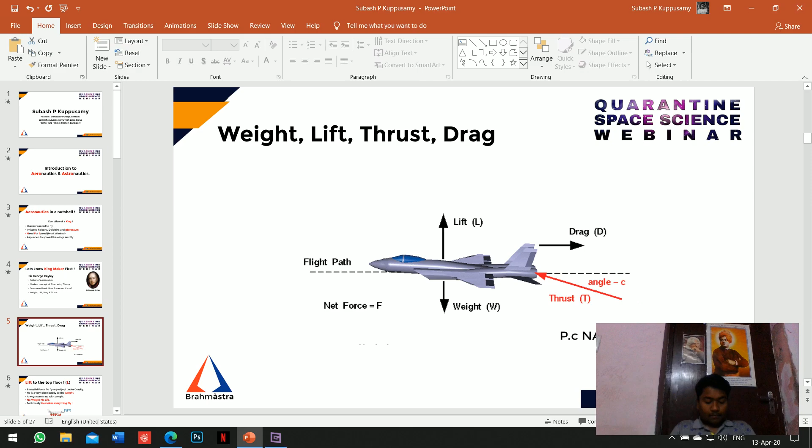He coined the term modern concept of fixed wing theory. He coined mostly the terms weight, lift, drag, and thrust, right? Okay, I'm so sorry.

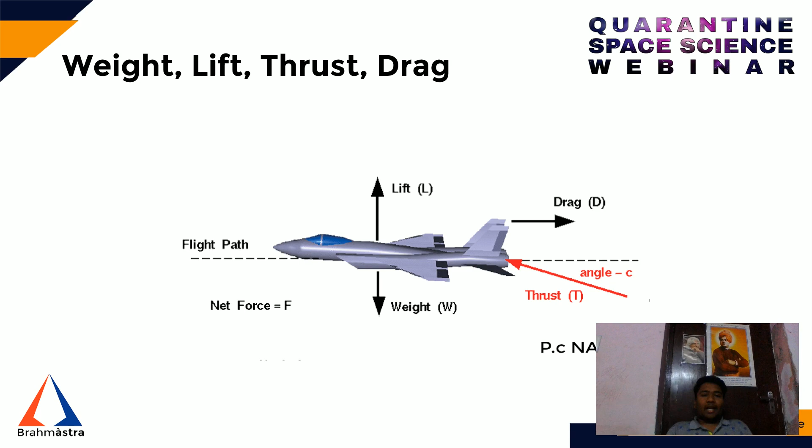Okay, let us see weight, lift, thrust, and drag. People have seen what it is, they will be saying the types of aircraft and everything like that. But the thing is, aeronautics majorly depends upon these four big words: weight, lift, thrust, drag. Without these four words, you cannot even think about aeronautics. Let us see what is lift.

Lift to the top floor - essential force to fly an object under gravity, right? And here is a very close buddy to the weight. Always comes up together. If lift comes up there, there would be weight. If weight comes up there, there would be a lift - no weight, no lift. Of course, if there is no weight, there is no lift. Technically, he makes everything fly. Without the term lift, there is no term called flying.

The next word is drag. Drag him down to the floor. The word drag is to drag the aircraft. He's a bloody bad guy, a very, very bad guy, and he makes your aircraft fall down. If he wants to make your aircraft fall down, okay, he will make your aircraft fall down, right?

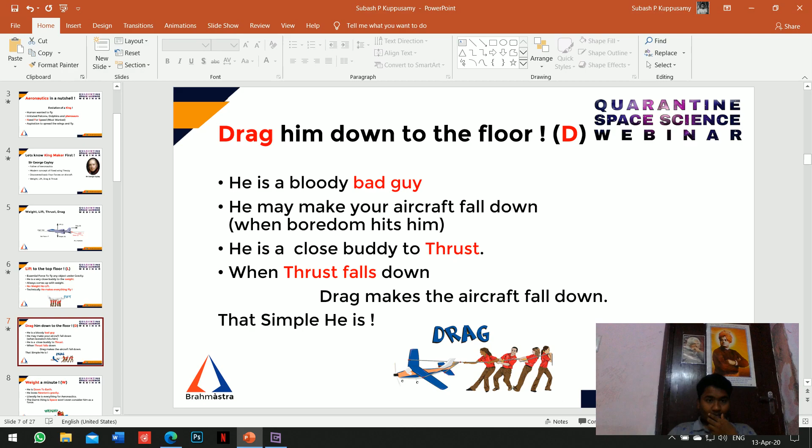Weight. We all know about the weight, and he is very down to earth because whatever you make it in the space, he will go to the earth. That is the term of the earth. And he loves Newton's law of gravity. Newton's law of gravity is whatever you make to be there in the space under atmosphere, it will come to the ground, right? Of course, he loves gravity.

Literally, he is everything for aeronautics. Without weight, you cannot term aeronautics without those four words: lift, weight, thrust, and drag. Literally, he is everything for aeronautics. The contrary thing and the contrast thing about the weight and astronautics is we won't consider the weight in space, because the weight only acts inside the atmosphere. Outside the space, the weight would be calculated as mass.

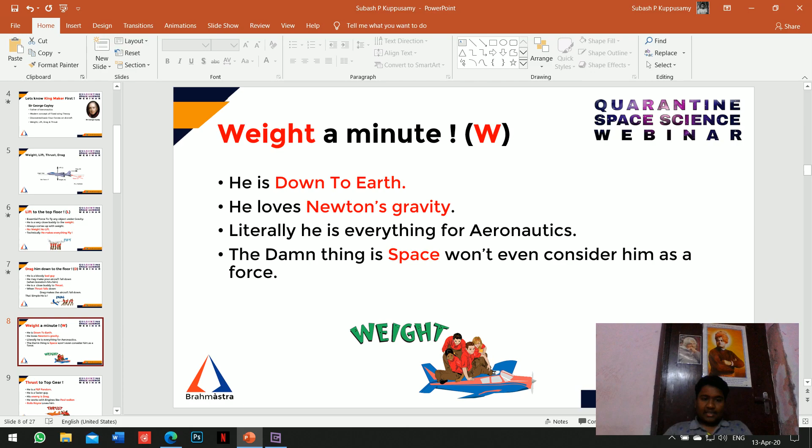The next term is thrust. Thrust is a term used to make the aircraft go in a faster way, you get it? Thrust loves Fast and Furious. He's a flatter guy, faster guy, and his enemy is drag. The drag, as I said, he's a very bad guy, you get it?

Whenever he thinks, he will be making negative vibes to thrust, and he works with the engines, right? The thrust is 100% connected with the engines. The engines make the thrust, and I'll be explaining about the engine soon. The forthcoming slides and engines: if we take the engines, we have known about the Rolls Royce Phantom and cars like those, but most people don't know about that. Rolls Royce is famous for making aircraft engines. They make the world's powerful turbofan engines.

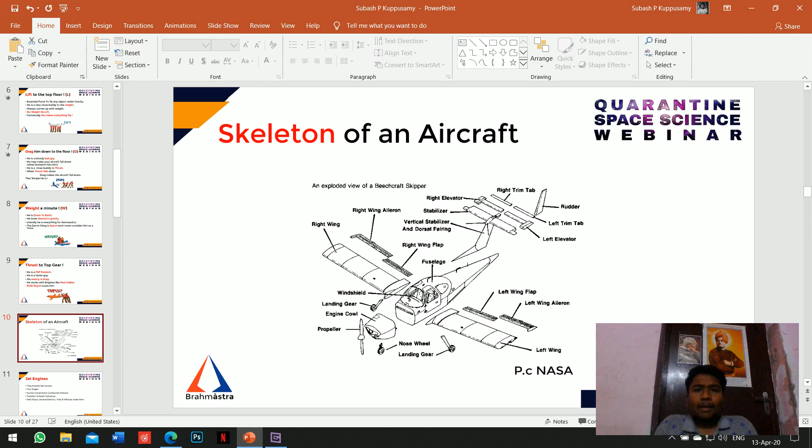Let us go for the propulsion thing. You guys have seen and known about the two-stroke engines, four-stroke engines, and I'm directly jumping to the turbojet engines. Let us see turbojet engines. Turbojet engines are like humans. Like humans, it has four stages.

We inhale, compress with our lungs, we exhale. Before that, we separate the oxygen and the blood, right? Likewise, suction, compression, combustion, and exhaust are the four major steps which take place in a jet engine, same as in the four-stroke engines. The types of turbojet engines are turbojet engine, turboprop engine, turboshaft, and turbofan. And the guys who make these engines are Rolls Royce, General Electric, Pratt and Whitney.

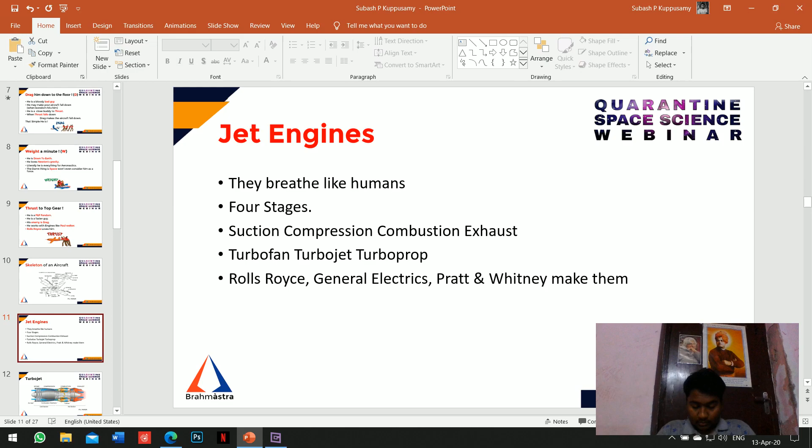Let us see the turbojet engine first.

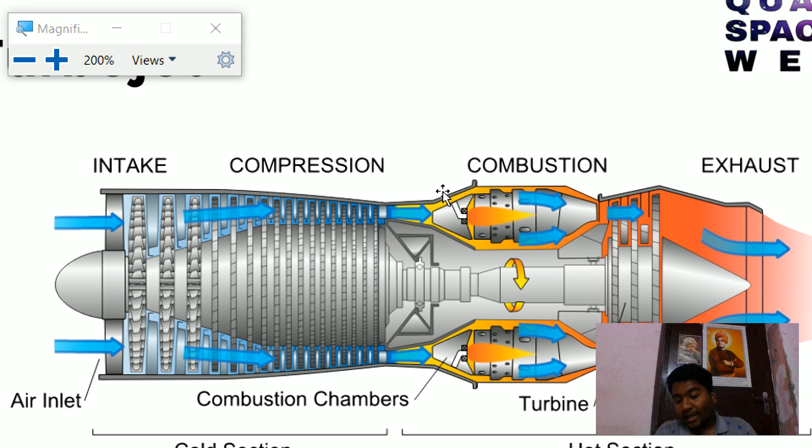The compressed air, fuel and fire mix up there. Exactly here, after this, is the turbine. The work of the turbine is to produce the power.

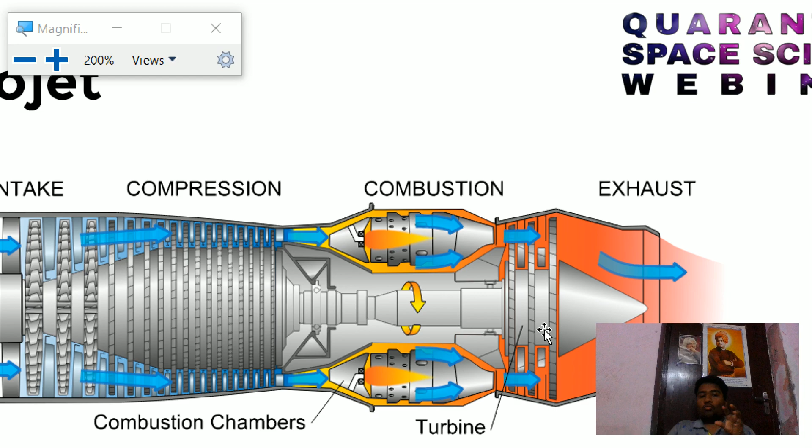For what is that? Let's consider, if we go for the turbofan engine, we dwell on the thrust. If we take the turbo, what is that? Let us see in the next tab. Yeah, it is a turbofan engine, made by Rolls Royce.

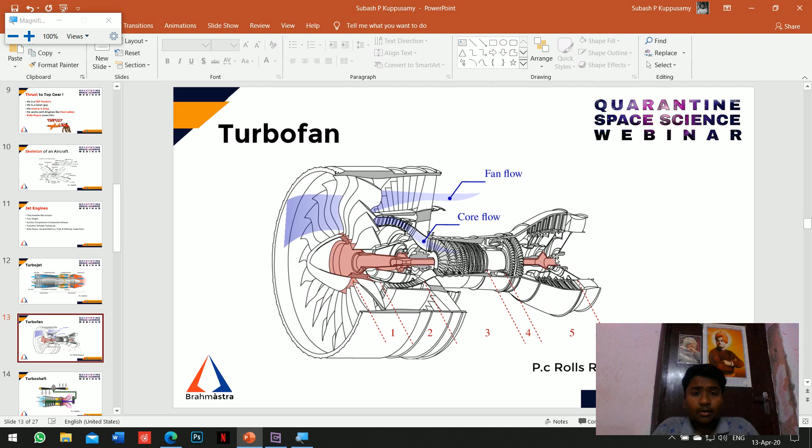This turbofan engine is made by Rolls Royce. I forgot the name of the engine, right? Let us see this. Why it is made here with the bigger fans is...

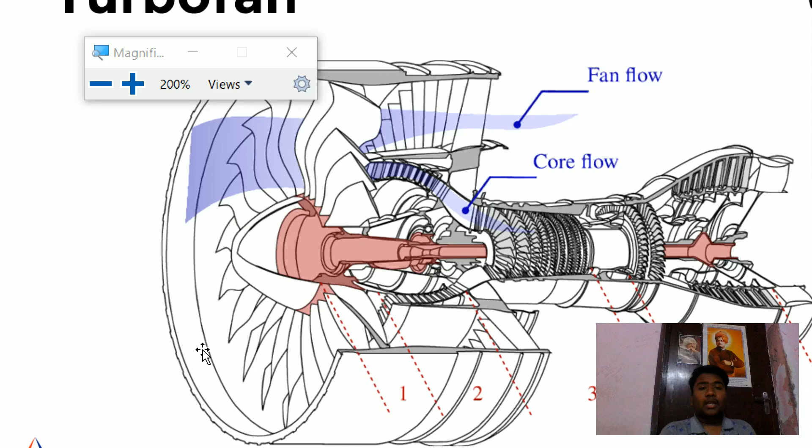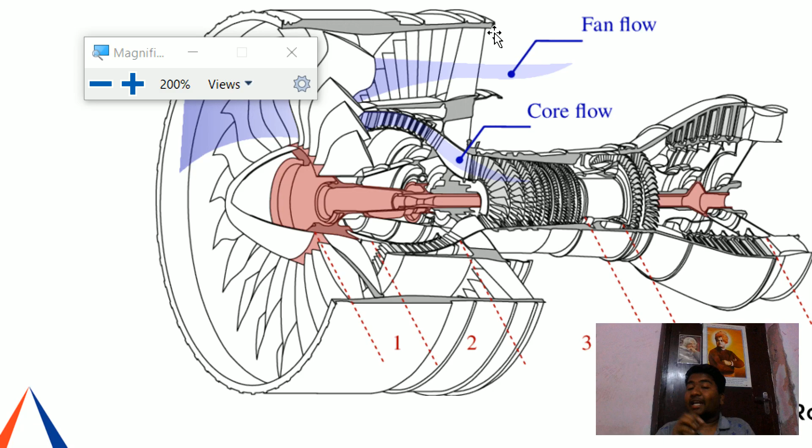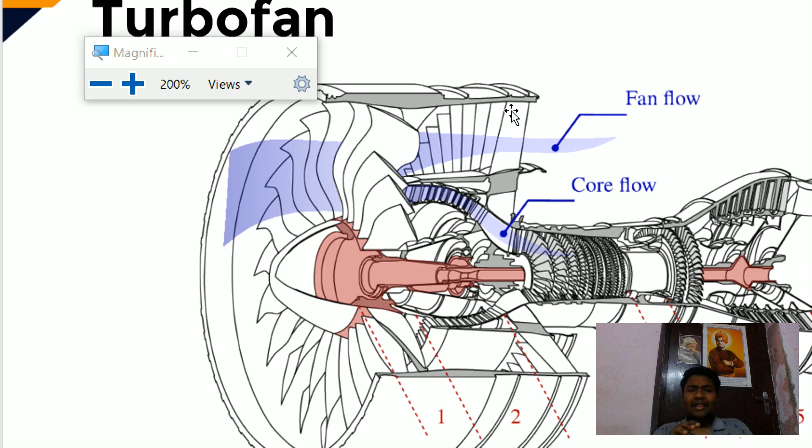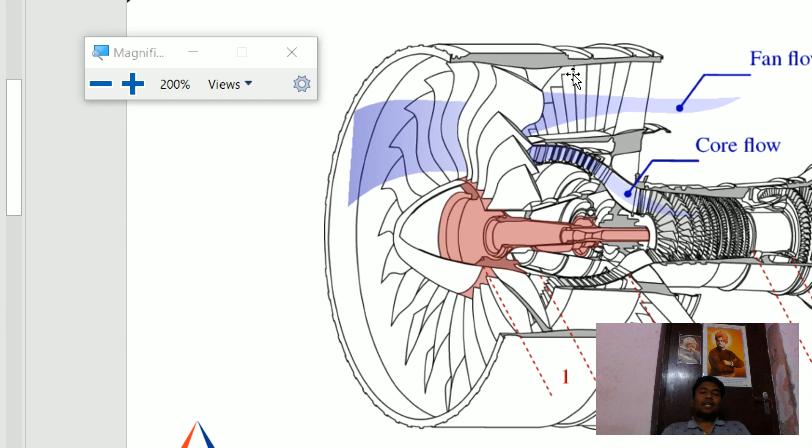Because of that, the engine fails fast. So people came up with the idea of cooling the aircraft engine. What they made is, the front portion of this part, the engine's cowl lip, has been increased in size. I could say 1:3 size. Because of that, cooler air comes in here.

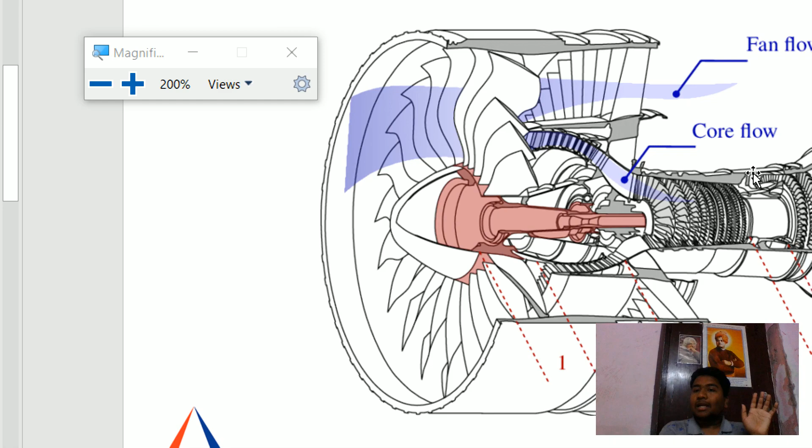Cooler air comes in here and transfers in a double way path. You can see the flow of the air here - the air moves inside the turbine here and the air moves outside the turbine here. The fan flow is given here so it cools the engine. It literally cools the engine.

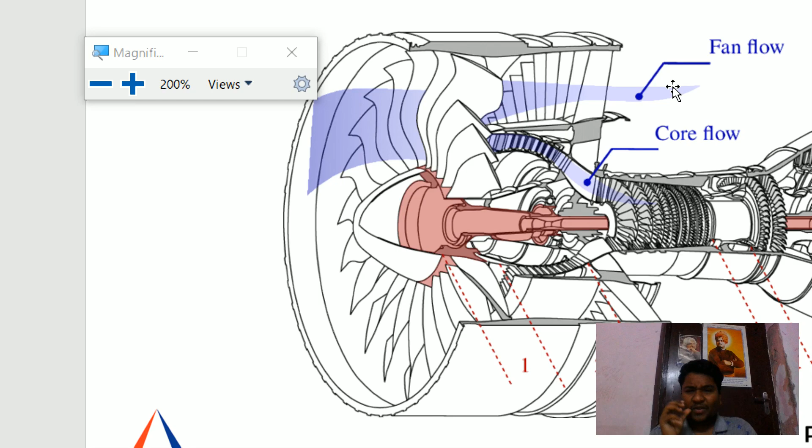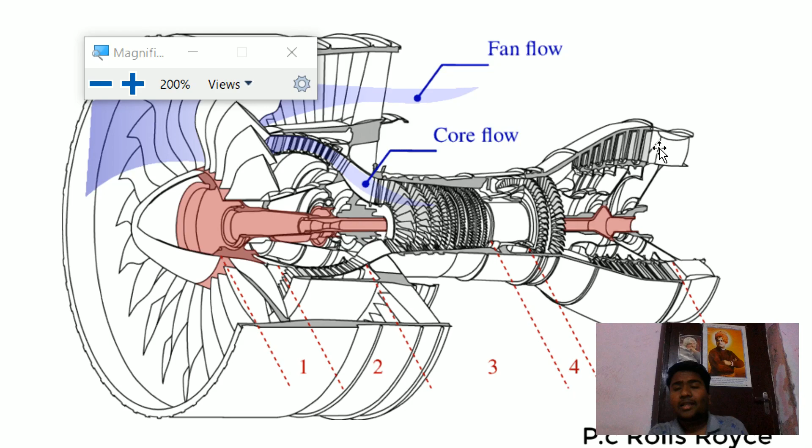There is another trick here. In fighter aircraft, there is a term called afterburner. The afterburner is placed in this position. The fuel will be mixed up with the air, the unburned fuel, and the higher pressure air will be burned again.

If the afterburner is on, the speed of the aircraft would be more - it's according to the engine. It can go beyond the supersonic.

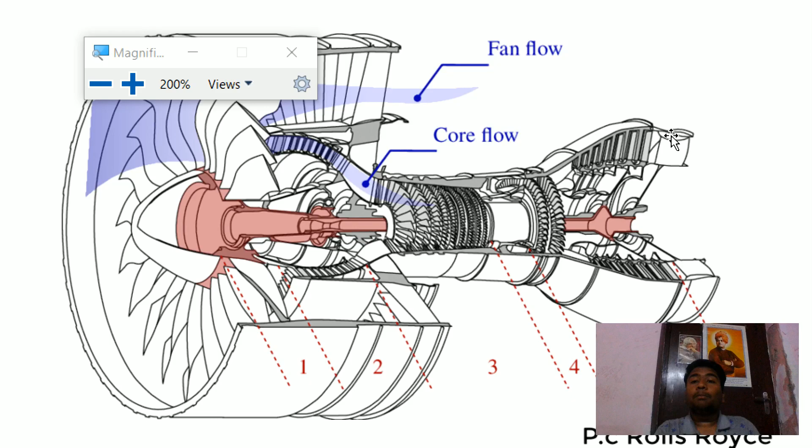I'm sorry, I'm distracted with this live video. I'm really sorry, there was a technical issue there, and I'm solving it by myself. I'm sorry.

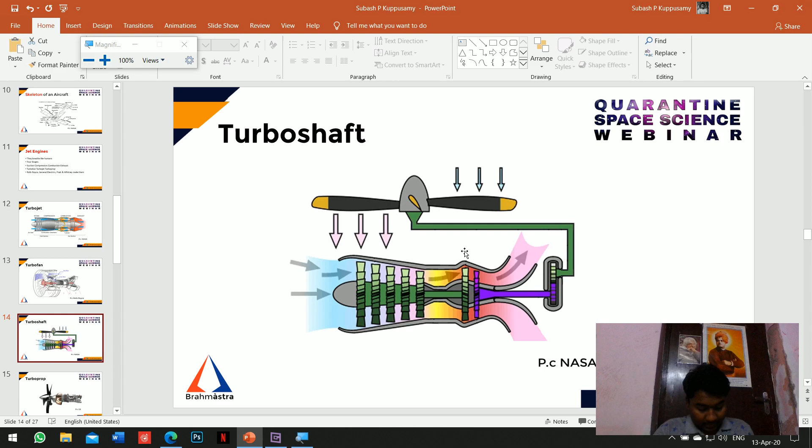Yeah, here comes the turboshaft. This turboshaft, guys, mostly dwells on helicopters. You can see it is gear powered.

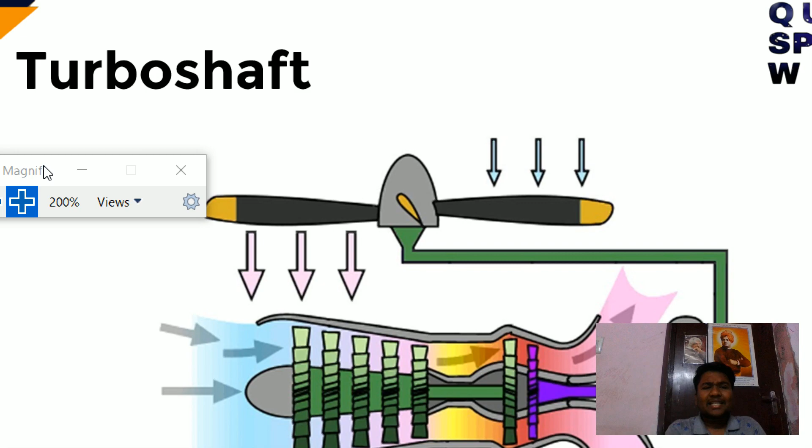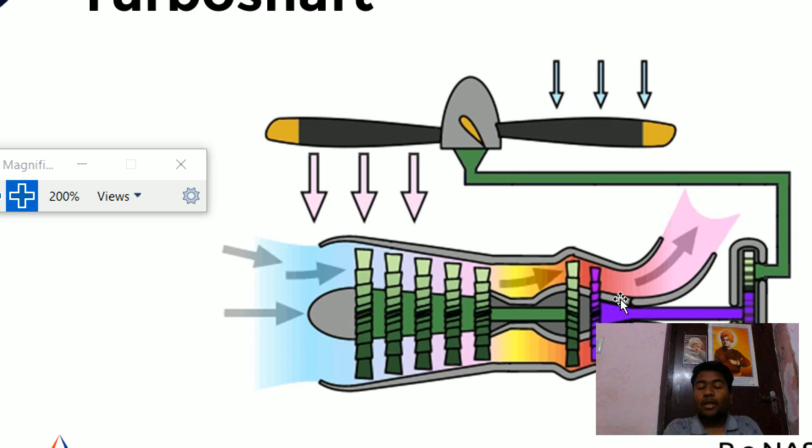It is like the turbojet engine. The air comes here, the compressor compresses the air here, the combustion chamber increases the temperature by burning it, and after this a turbine is connected here. That turbine is connected with the reduction gear here. This reduction gear reduces the rpm of the turbojet engine. It is actually the turbojet engine.

It is something modified in the turboshaft. Why are we using the reduction gear here? Because if we use the rpm of the turbine engine directly into the propeller of the helicopter, the rpm would be more than a lakh, at least 50,000. If the propeller reaches 50,000 rpm, literally shock waves would be forming.

Because of those shock waves, the propellers will break like anything. It will break like anything, and it is the worst thing you can expect in your dream. That is a nightmare - a propeller bursting when a helicopter flies.

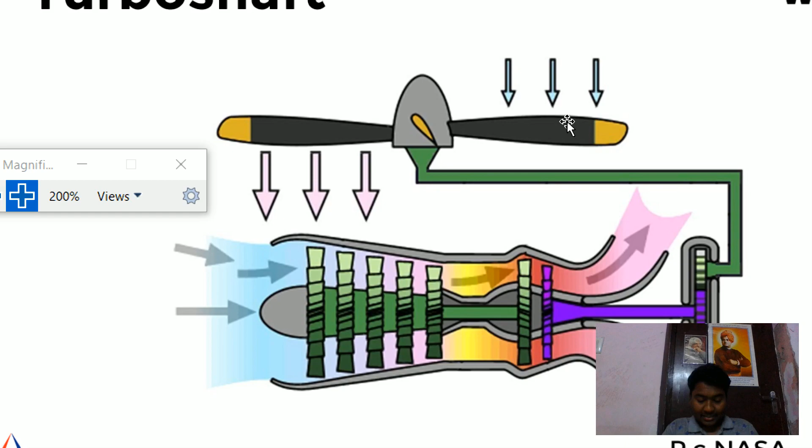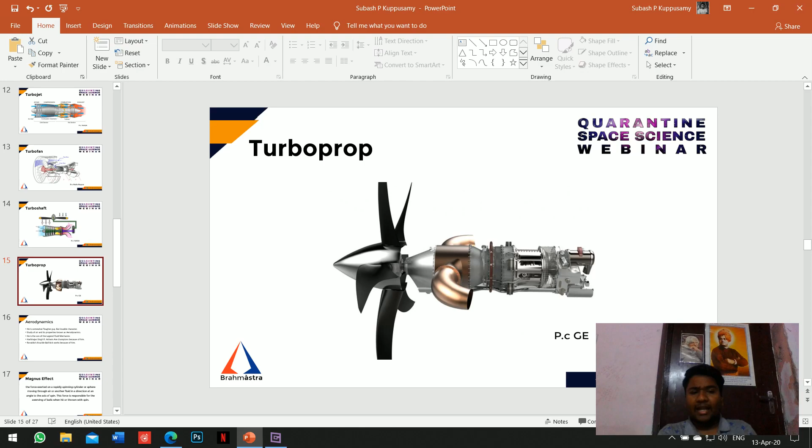They work on propellers, right? Let us go to aerodynamics.

Aerodynamics is my lovable subject. Even in my library, he's there, lining up. He's somewhat a tougher guy, a bloody tougher guy, but he is a lovable character. The study of air and its properties is known as aerodynamics, and he is the son of the legend, fluid mechanics.

The air and water are literally the same. If you take a scale, if water is 1,000 in density, then air is 1 in density, right?

So if you want to analyze a fluid thing in an aircraft wind tunnel, you can use a smoke tunnel. Smoke tunnel is a very easy, squeezy thing for making analysis. You can use it for visual analyzing too.

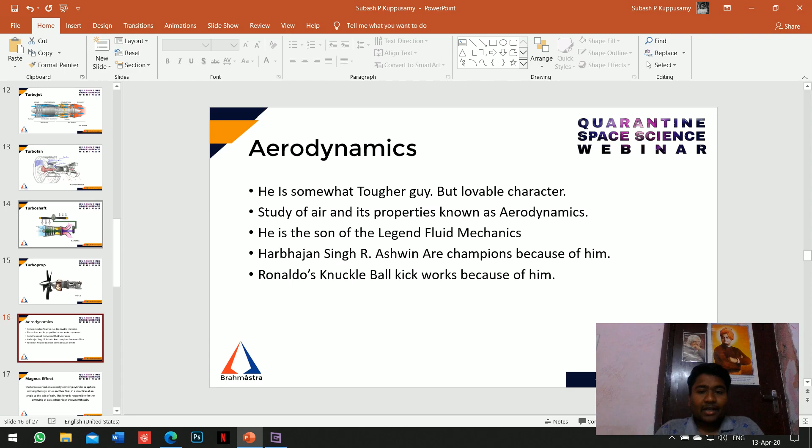Harbhajan Singh, Ravichandran Ashwin are champions because of him. Why? Because there is a thing called the Magnus effect. Because of the Magnus effect, spin bowling becomes easier for spin bowlers. And Ronaldo's knuckleball kick also works behind aerodynamics.

As I said, the Magnus effect is here: the force exerted on a rapidly spinning cylinder or sphere moving through another fluid. I'm sorry with this theory, but it should be there.

The Magnus effect is nothing but, let us take a ball. In that ball, if one side is rougher and another side is smoother, the ball turns automatically to the rougher side. That is the Magnus effect, and by using these tricks, spin bowlers make things happen.

Let us go to aircraft structures. Aircraft structures is nothing but a nightmare to normal people. He is a mixture of high school mathematics and physics. Without knowing physics and mathematics, you can't even touch him. A simple common sense is enough to know him. He's just an updated version of vector mathematics.

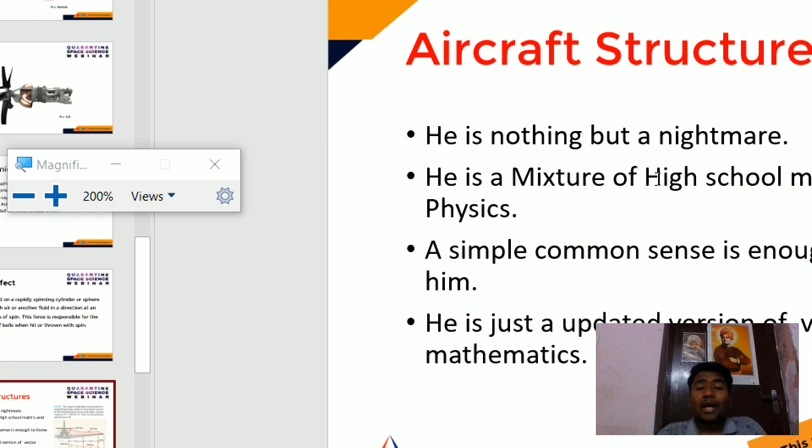Let us see here how a normal aircraft structures problem would be. We have to find the tip deflection. The wing of the small plane is represented by a simplified prismatic cantilever beam model acted on by distributed loads as shown in the figure.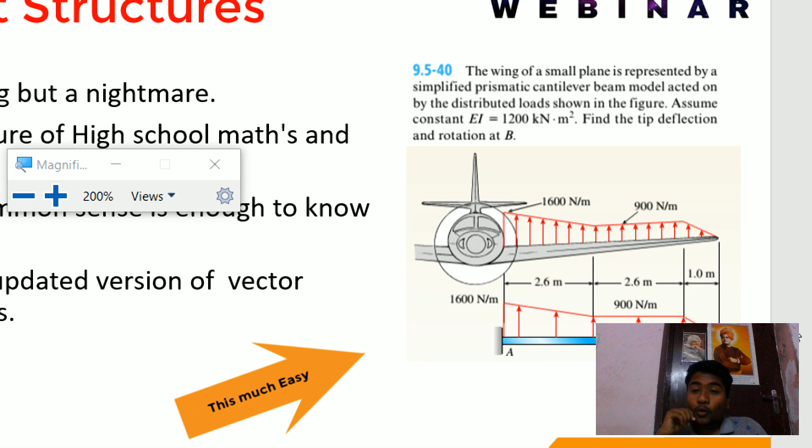See here, it is known as the distributed load, and it is a UDL here, and it is a UVL here. It is varying, and it is not varying, and it is varying again, right?

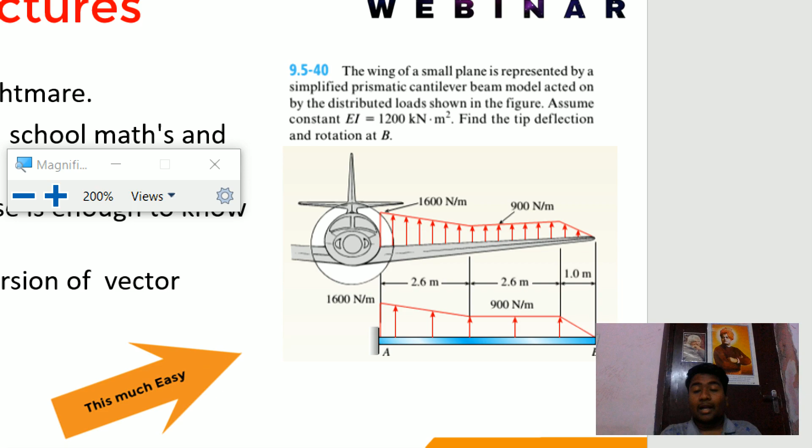They have given the elasticity modulus and the rigidity modulus as 1,200 kilonewton meter square, to find the deflection at point B. At this point, we have to find the rotation. This is a nightmare for people who don't know physics and mathematics. I'm really sorry, guys.

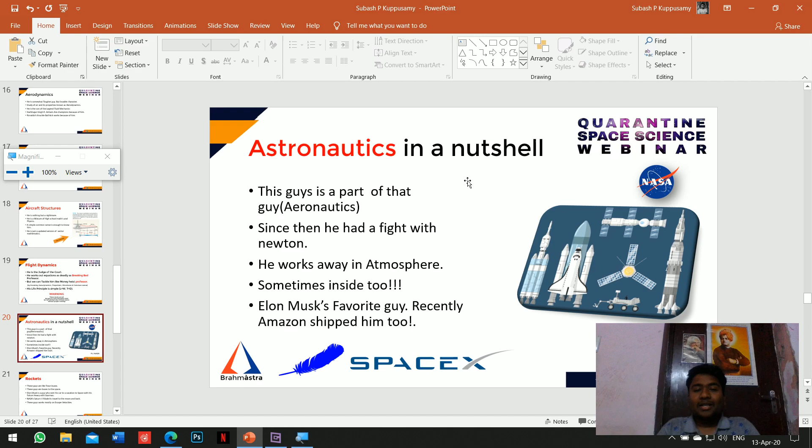Astronautics is a favorite subject for Elon Musk. Recently, Amazon shipped something too.

Let us see rockets - these guys are like town buses, they come, they go. It used to be single-use capsules in the 1990s, even in the early 2000s. But Elon Musk, who founded SpaceX and was one of my inspirations, made the spacecraft like town buses. If you subscribe to Elon Musk, for a month he'll be launching a Falcon Heavy to the International Space Station, just to supply food and things there. Recently, that sarcastic guy did a literally hilarious thing.

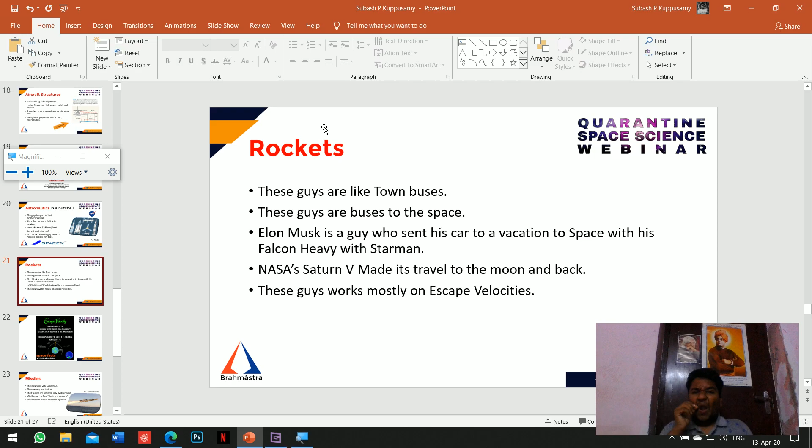Let us go for rockets - these guys mostly work on escape velocities. Escape velocity is the minimum speed required for an aircraft or spacecraft to escape the atmosphere of a massive body. If you take a celestial body - let's take my mobile phone - if I want to fly this mobile outside the atmosphere, I need an escape velocity. The escape velocity of Earth's atmosphere is 11.186 kilometers per second.

I think so, yes, it's correct - you need 11.186, let's consider 11.1 kilometers per second. It is denoted by VE. We mostly work on propulsion because reaching escape velocity is very tough for anyone - it is very tough for anyone.

What we used to have before were solid rocket propellants, solid rocket propulsion. What Elon Musk did is literally idyllic - he replaced solid rocket fuels with kerosene. He is using kerosene as his fuel. RP1, rocket propellant one, is the fuel's name. More technically, RP1 is the most purified gasoline.

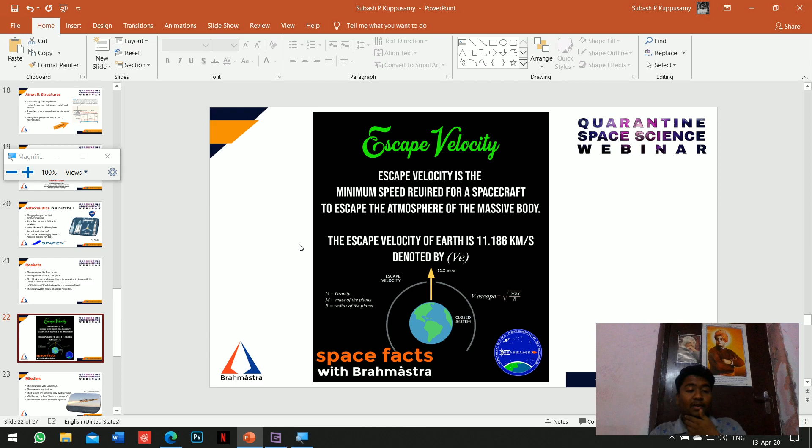Sorry, it is not gasoline, it is kerosene. So let us go for the missiles here. Missiles. These guys are very dangerous. Why? Because the fat guy and the little guy thrown out in Hiroshima.

Okay, missiles. Missiles. These guys are very dangerous because of Hiroshima.

I'm really sorry because it is again a technical issue. I have seen the live, I have seen the live.

I'm really sorry. Let us go for the missiles again. These guys are very dangerous, fatal, and critical because they are the ones who target. The simple example for missiles is a bullet.

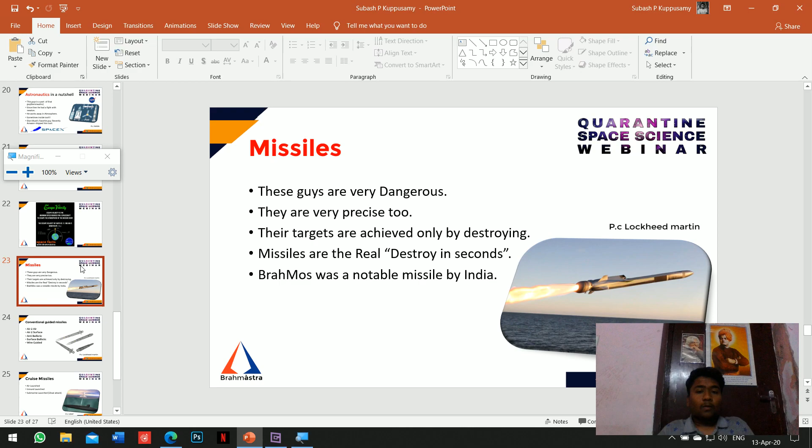Let us go for the conventional guided missiles. The conventional guided missiles are air-to-air missile, air-to-surface missile, anti-ballistic, surface ballistic, and wire-guided.

Let us see the air-to-air missile. It is nothing but the missile launched during a dogfight between aircrafts. It is mostly heat-seeking missiles. Then there's air-to-surface missiles.

Air-to-surface missiles are like bombshells. Bombshells are one of the main examples for air-to-surface missiles. I don't know whether you can also say the fat guy and little guy are air-to-surface missiles.

Anti-ballistic missiles are launched opposite to ballistic missiles. Surface ballistic missiles are launched from normal ground. And wire-guided missiles are like...

Of course, I'm sorry, bombshell is not also a missile, but um... I'm sorry guys, I'm blacked out.

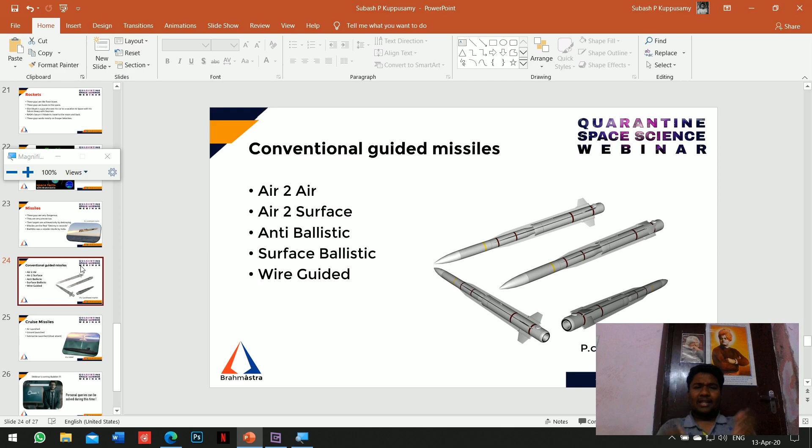Let us go for the cruise missiles. As I said, the cruise missile goes inside the atmosphere. They are mostly ground launched.

Cruise missiles are air launched, ground launched, and submarine launched. And if you take...